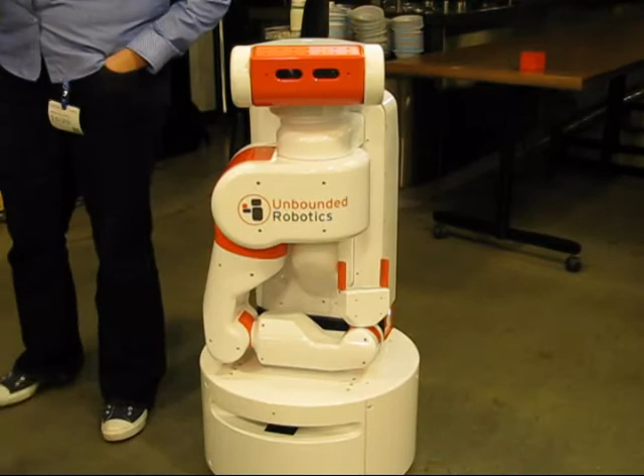Back in January of this year when we spun out, a lot of you came running up to me asking what are we building, and half of you asked if we were building Rosie. No matter how desperately I wanted to give that to you, we're not there yet. I hate to break it to you.

The question people constantly ask is: is the personal robotics revolution here yet? What I'm trying to do tonight is frame the importance of what we're trying to do at our company with this robot, and how it fits into the greater vision of robotics, specifically for personal robots. After my talk I'll answer a couple of questions, then Mike will give a more technical demo showing some of the software on the robot.

In the 1920s, robot first became a commonly used word, used in a Czech play. In that play, these mechanized beings took over the world, like all robots do, it seems.

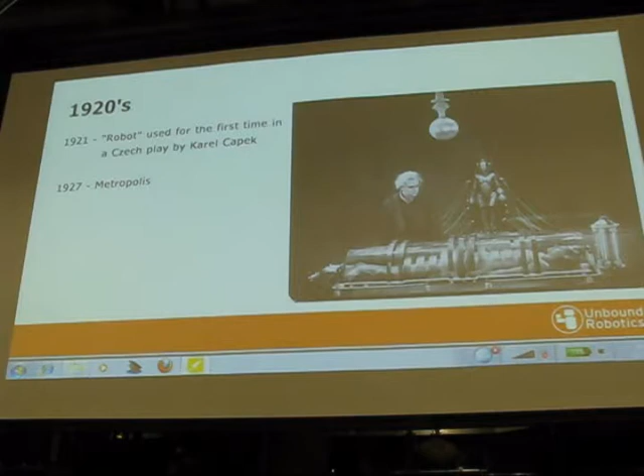Only six years later, Fritz Lang made a movie called Metropolis, considered one of the first robot movies, and again it showed the eventual demise of the human race at the feet of robots.

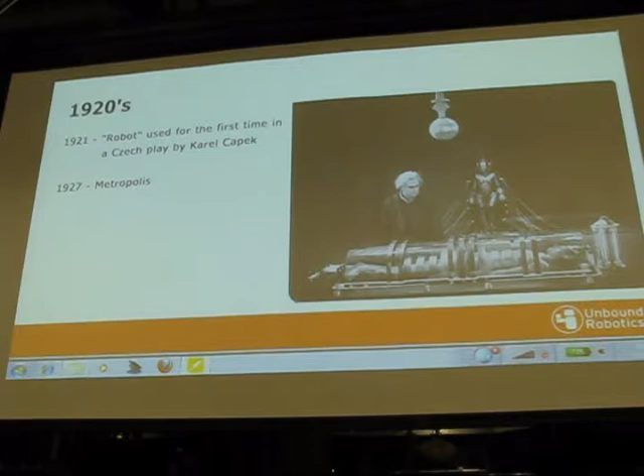So here we are in the 1920s, a robot actually hasn't even been built yet, and we're already predicting that they're going to take over the world.

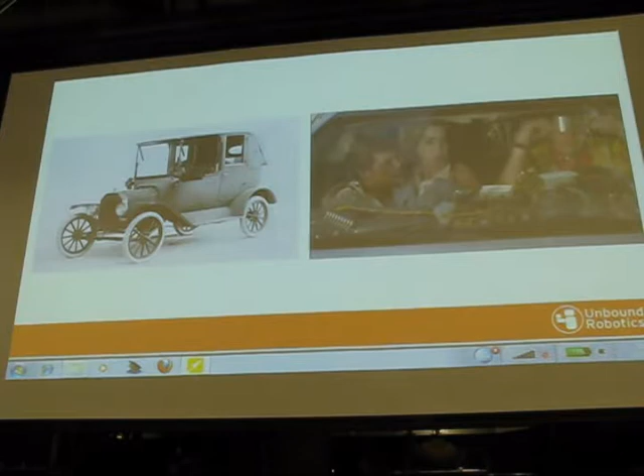It's kind of like Henry Ford puts the Model T on the market, and then Back to the Future comes out saying we don't need roads. So you're like, well, come on Henry, where's your autonomous horseless carriage?

That's kind of the pressure that's been put on robotics, even as far back as the 1920s. We don't even have robots yet.

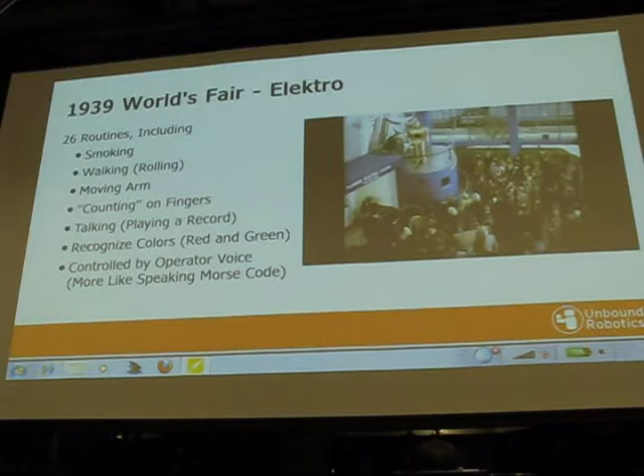In 1939, considered maybe one of the first robots - if you asked people before 1950 what a robot was, they'd refer to Elektro.

Elektro was just a mechanism that could do 26 unique tasks. What was really cool is it had a whole bunch of vacuum tubes, and the operator would speak into a can in a Morse code pattern. He'd say, okay Elektro, let's go - if there were 3 things, the robot would walk. If there were 3, then 5, then 2, the robot would smoke. Because that's what all robots need to do.

Those 26 actions were really cool, but they set expectations really high - and we still don't really have a robot yet.

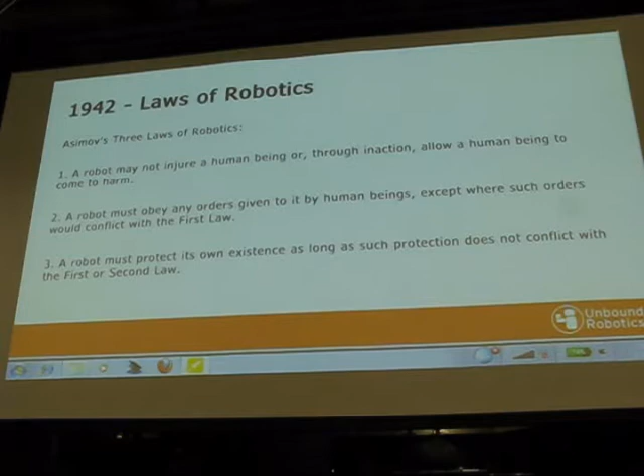Then in 1942, still no robots, but Asimov had already made rules for us. It's pretty rough - the field hadn't even started.

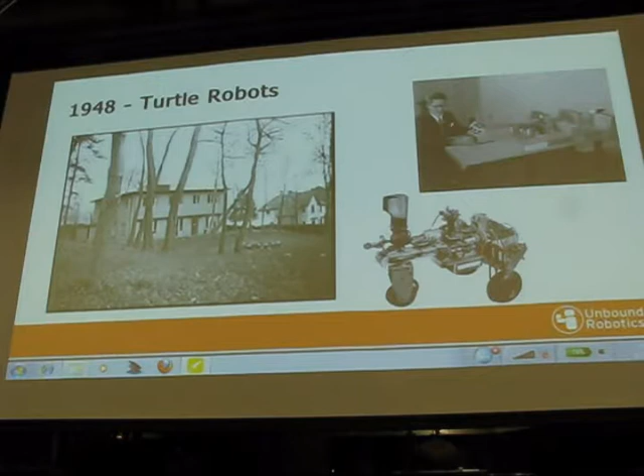Okay, so 1948, our first robot - bio-inspired robots. Gray Walter was working in Great Britain, and he made what was called the first turtle robot. He actually made a pair of them, Elmer and Elsie, and they could drive around and react to their environment. It was all the rage.

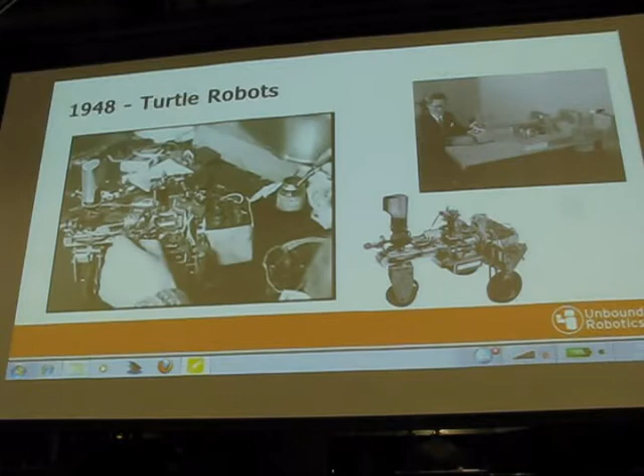Dude, I wish I could have done this. He made some very interesting and complex contraptions all the way back to 1948, and they could react to their environment very well, so it was pretty cool.

But then 1954 came, and it was awesome. The Unimate arrived, and we suddenly jumped from a bio-inspired turtle robot that doesn't do much...

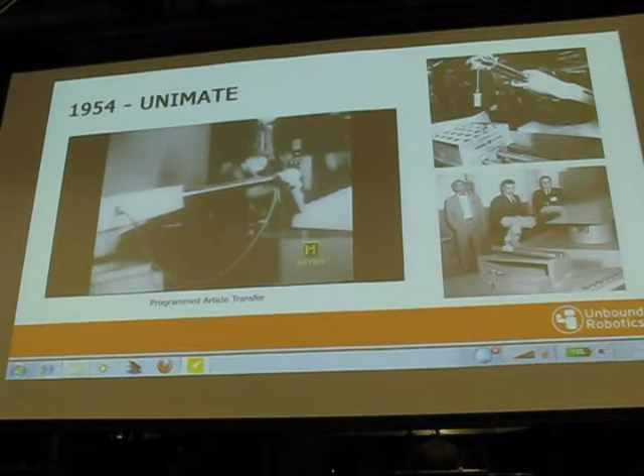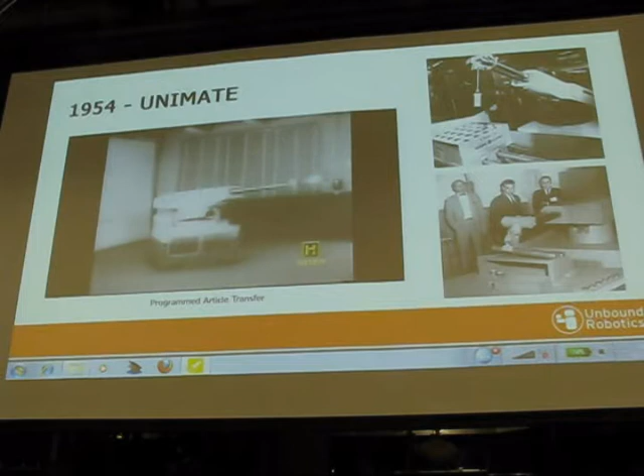1954, the Unimate - a programmed article transfer device, which is really cool because they didn't even start calling these robots then. This robot actually took 7 years to finally end up as the first robot in a GM manufacturing plant.

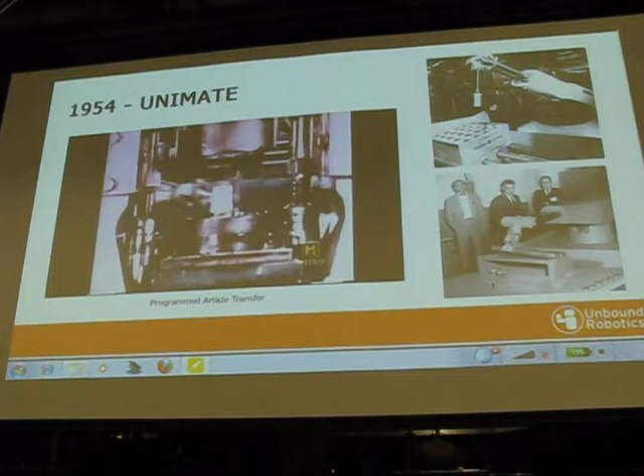It would actually pull very hot things out of a press and then cool them down. And what's really cool about the unit is that it didn't have a computer. All the programming was done on metal tapes, like metal drums, and it was completely pre-recorded. You would put it in there, run the operation, and it would just do that forever.

At this point, you don't have computers really controlling robots. Then in 1966, forward kinematics brought the homogeneous transform - groundbreaking, it enables robots and computers to finally come together. The math is there to finally do interesting things with robot arms. So the Rancho arm is the first computer-controlled arm, though it's still not electric. Then several years later, the Stanford arm comes out, and it's the first fully electric computer-controlled arm. That's groundbreaking, and it happens all through the course of the 60s.

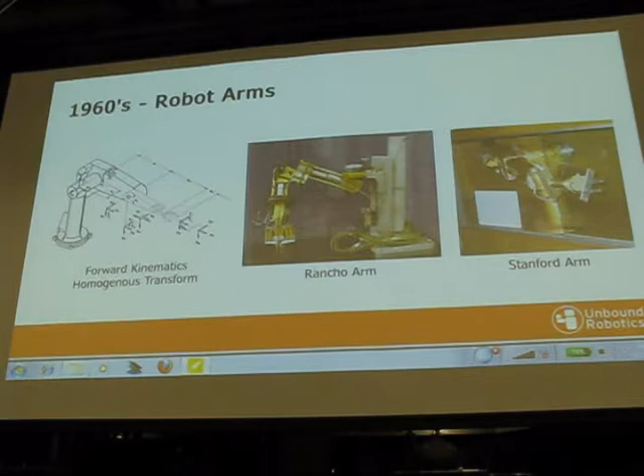But unfortunately, we're barely moving our arms in robotics, and HAL is kicking our butt, you know? Here we are as roboticists - we've barely got robots, and we've got robots taking over the world, people in space. I mean, they're not even on Earth anymore, they're in space.

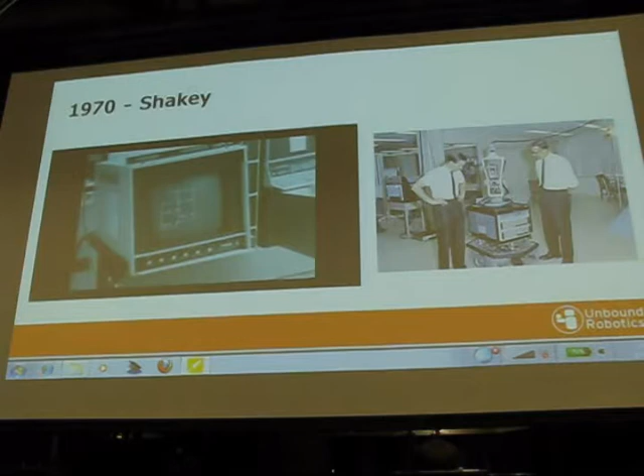Then in 1970, the dawn of modern-age robotics - Shakey, which was created at Stanford Research Institute. It wasn't going to be called Stanford Research - it started off with that, and then it became SRI International.

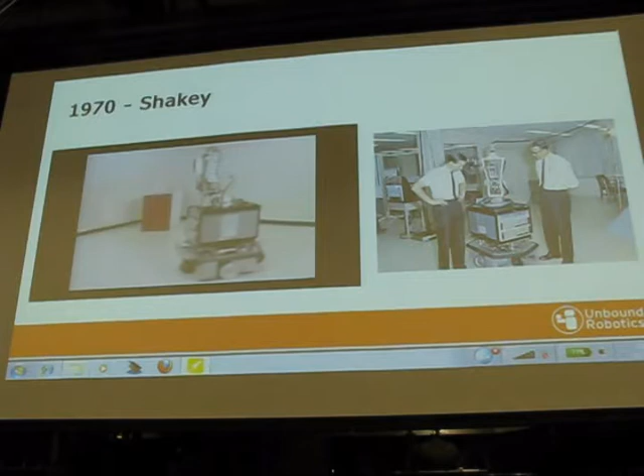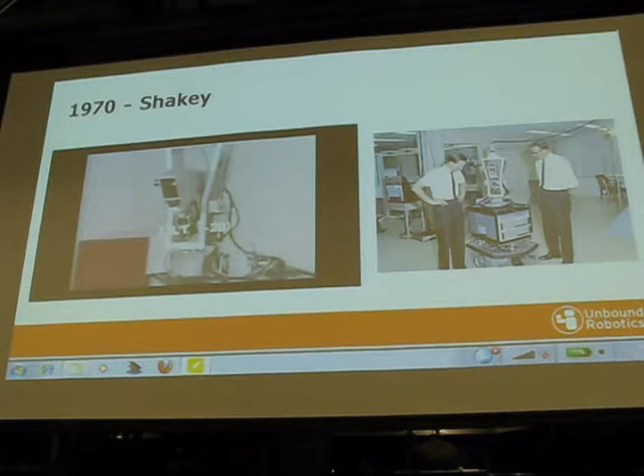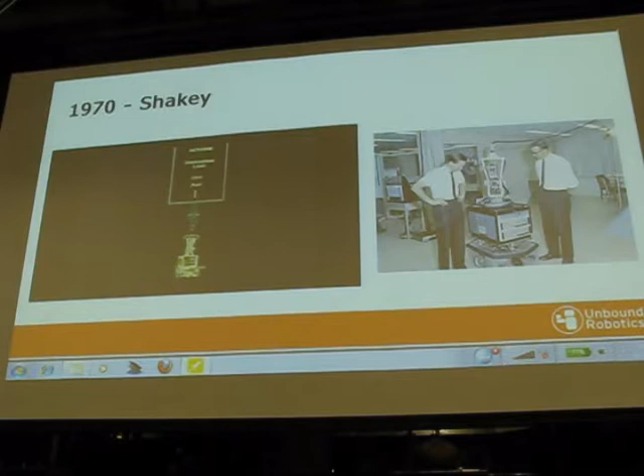But what's really cool is this robot could drive around autonomously, and the way it would execute its programs is it would collect data locally on the machine, and then use radio transmission to transmit it back to servers. In the 1970s, people were already doing wireless communication for this robot to do off-board execution. What's interesting is she actually took about an hour to drive 2 meters across the room - so we're not going groundbreaking speeds here.

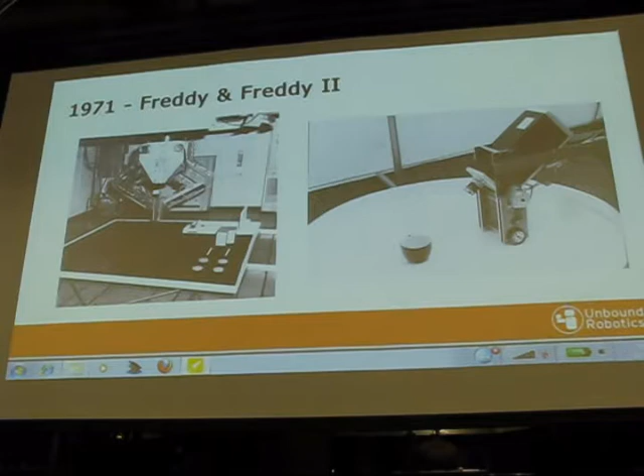At that same time, while people were working on autonomous mobile robots, people were also working on autonomous manipulation robots. Freddy and Freddy 2 were manipulation robots that could identify blocks, pick them up, and stack them. So here we've got the two parts of personal robotics sitting out there across the United States in different labs, working on autonomous mobile robots and autonomous manipulation.

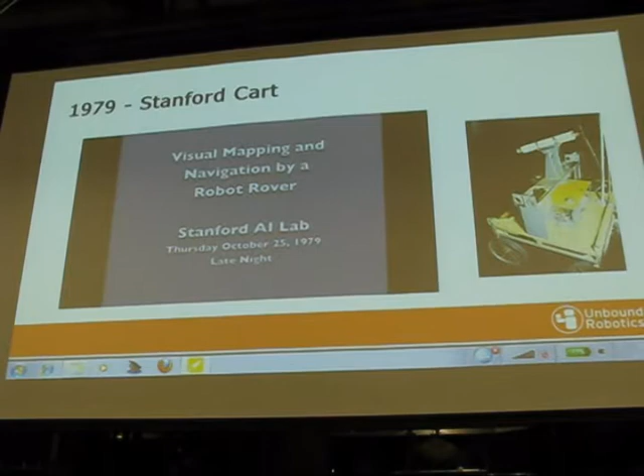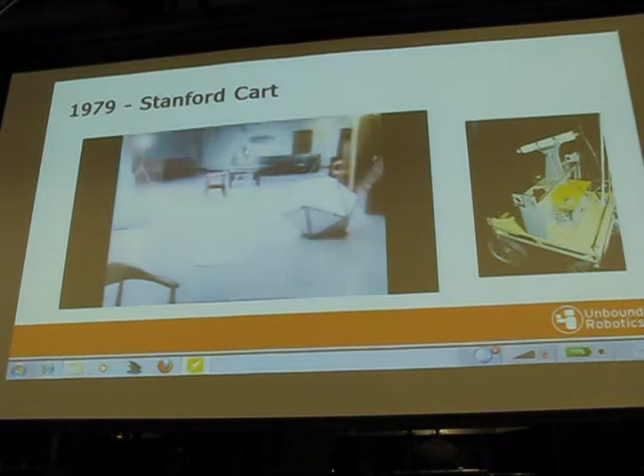Then in 1979, the Stanford Cart came, and it was really interesting because it did all the processing on board. It was actually able to go across an entire room full of obstacles by itself. It may have taken 8 hours to do it, but that was pretty high tech for the time.

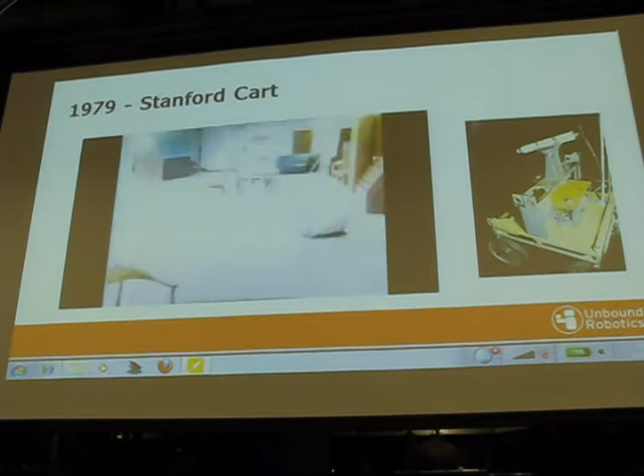Suddenly you had its only autonomous agent - you could let it loose in the room and it would behave on its own, monitored, with probably the people sitting there worrying. But it was the first step in truly autonomous behaviors.

Then the 1980s came, and everyone went in every direction possible. It was truly a birth of everyone doing anything they could for robots to do phenomenal things. It was very limited to people with lots of financing and money to do interesting robotics. A lot of people worked on walking robots that could play instruments, robots that could drive around autonomously, and we saw a lot of movement in industrial robots because they had very nice conditions - everything was kind of a green environment.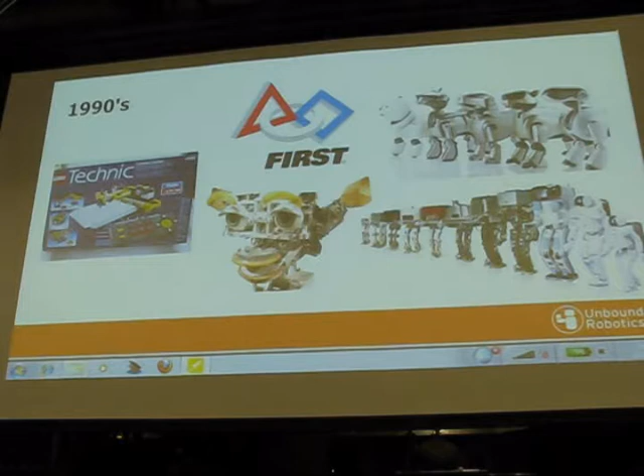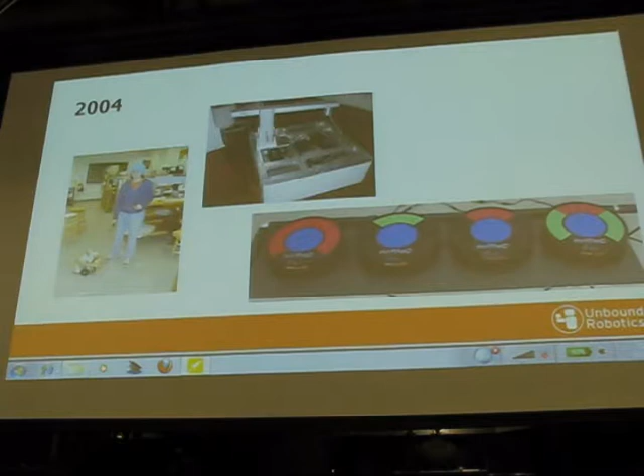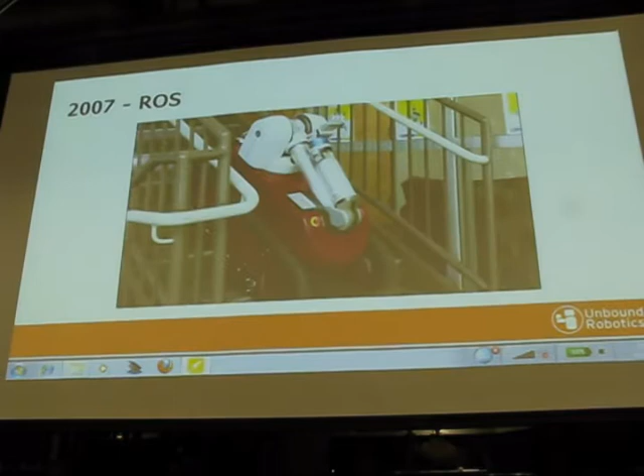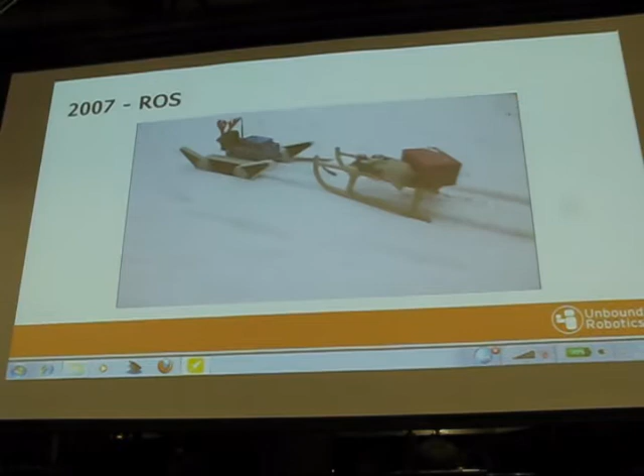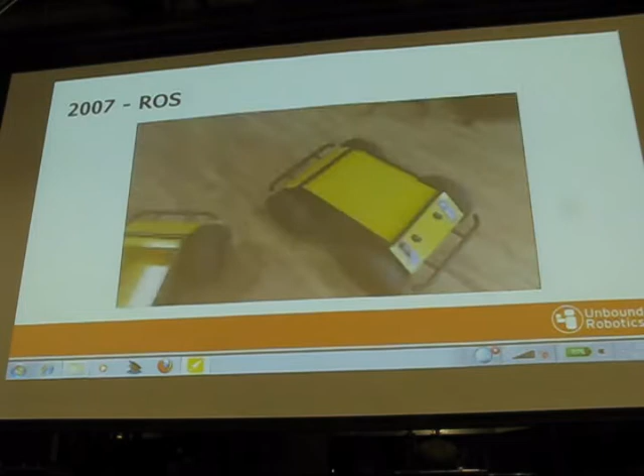In 2007, I went to work for Willow Garage, and we started working on ROS. ROS is what catapulted robotics development from people doing everything separately in the 1980s and 1990s and not talking to each other, to something talking to each other. Open source middleware enabled programs that used to run on one robot to run on many robots. All the robots shown in this video are running the same software, which is very empowering.

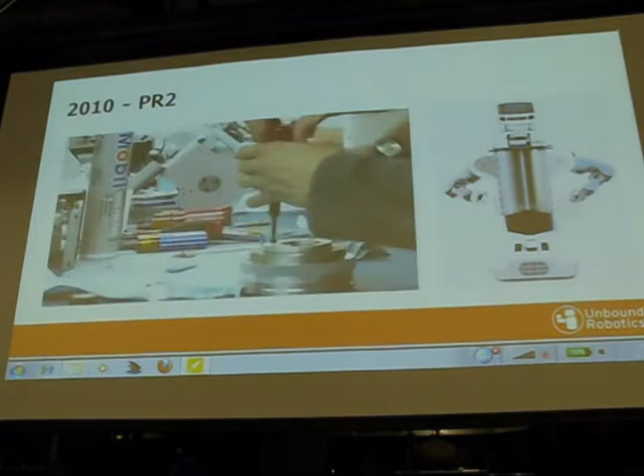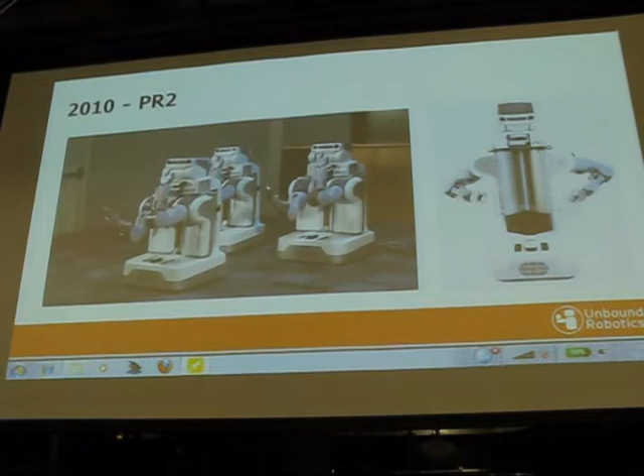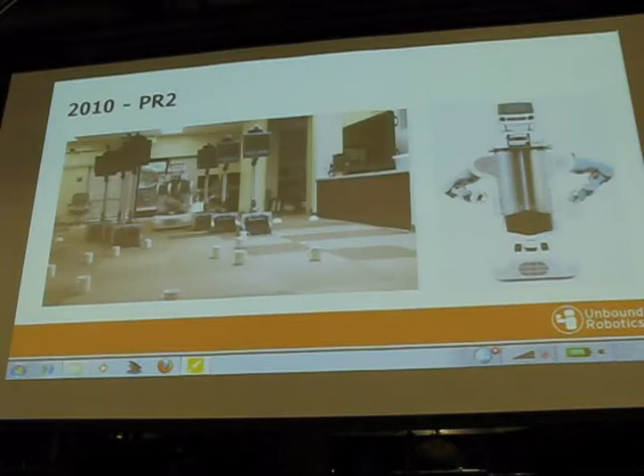In 2010, Willow Garage released the PR2. The PR2 showed something interesting about having a platform for robots. There are today 43 PR2s in the world, spread out across about 39 institutions - some people have two. What it enabled was collaboration on a whole other level. When you have robots that are not the same, it's very hard, even with a common software infrastructure, to have common applications that can run on those robots.

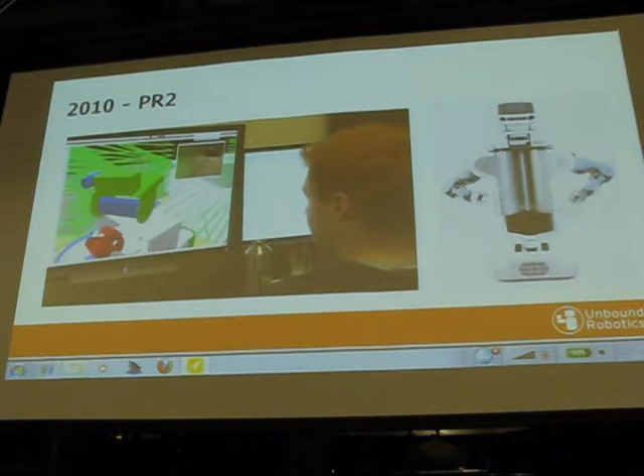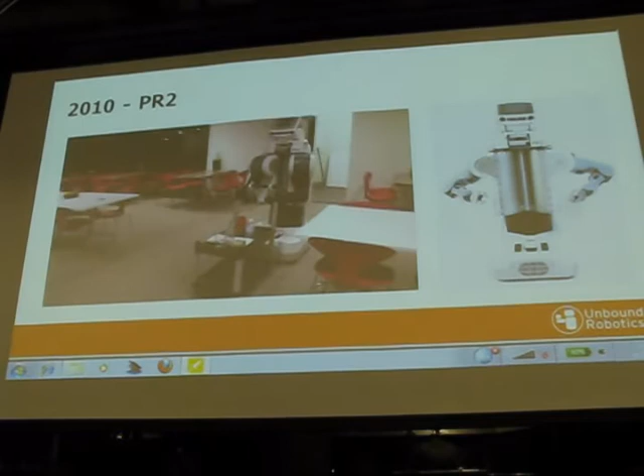It's the same as phones, it's the same as computers - you have to have a bridge to start developing applications. The PR2 was kind of the robot that made that bridge, combined with the software platform.

When we compared the PR2, there were a lot of other mobile manipulation platforms that came out around that same time. The difference between them and the PR2 is there's only one of them, and they're pretty big. Most of these robots cost about $300,000 to $400,000, just like the PR2. But the difference is, like I said, there's only one of them, and it was very hard to collaborate among these robots and help advance state-of-the-art robotics.

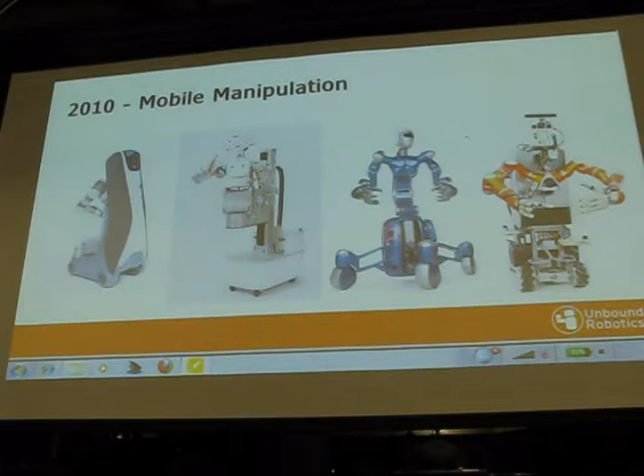Then in 2011, Mike started - you can see that ROS enabled people to do interesting things. Mike was able to do all sorts of interesting things with hardware that Derek and I weren't able to do in 2004, because the software was there to enable him to prototype and iterate hardware faster and easier.

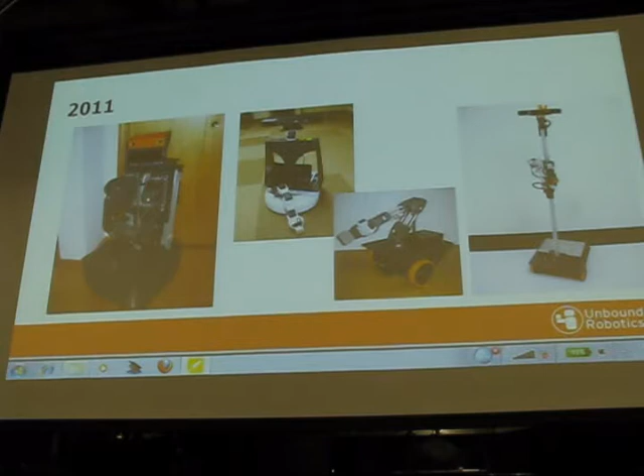In 2011, myself and a coworker worked on a project called Turtlebot to try and bring the cost bar down for enabling people to do more interesting things with mobile robotics. But the big feedback we got was, well, all we can do is drive around, and that's not very interesting because we can't actually interact with the real world.

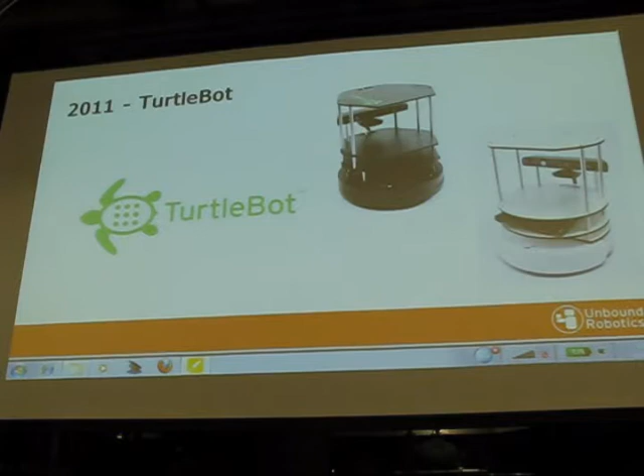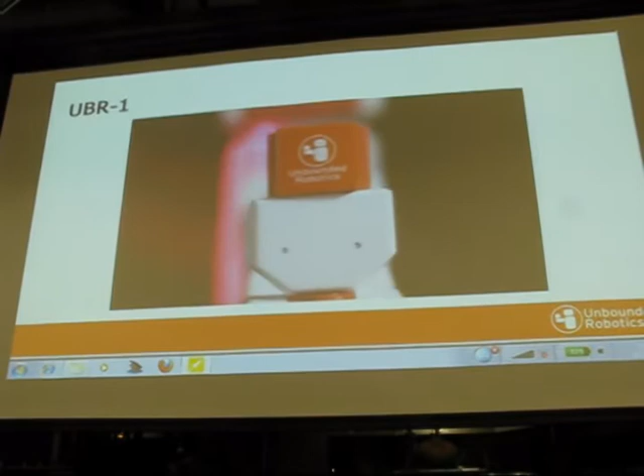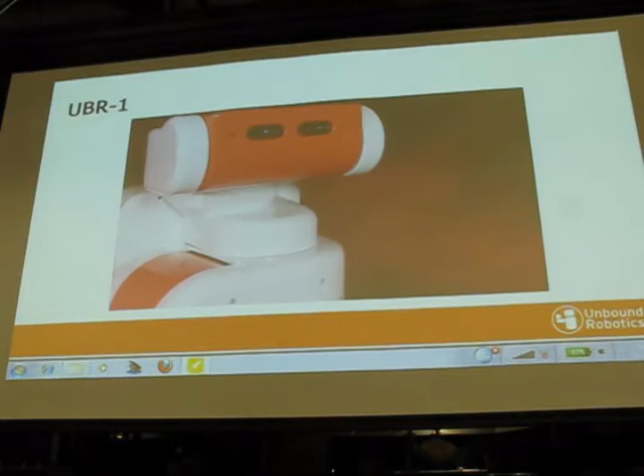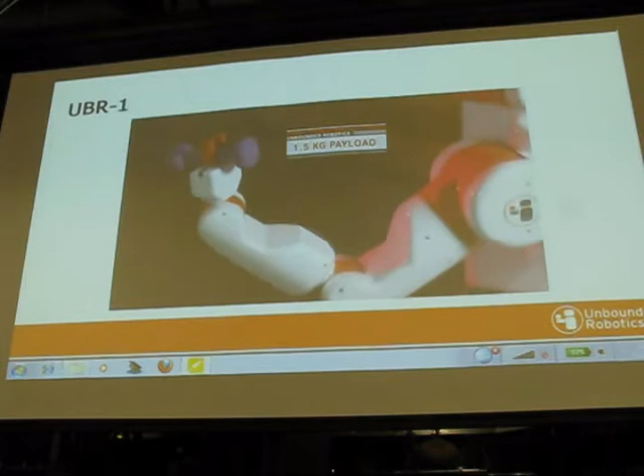So when we spun off from Willow Garage company, we wanted to change that. We wanted to enable people to have access to robotic platforms at an unheard of price, $35,000, to really enable a large amount of people to have access to a single platform and change the landscape of robotics. We see this platform as not only something that can be used by universities, researchers, and corporate labs, but also as something that can go out and do real work in businesses. That's our vision for our company - advancing the state of robotics in general.

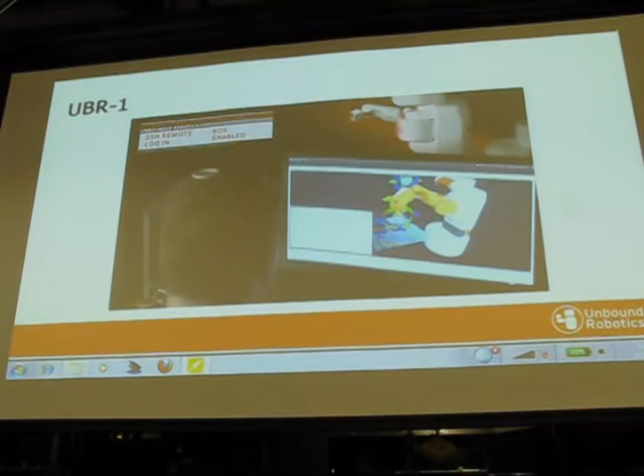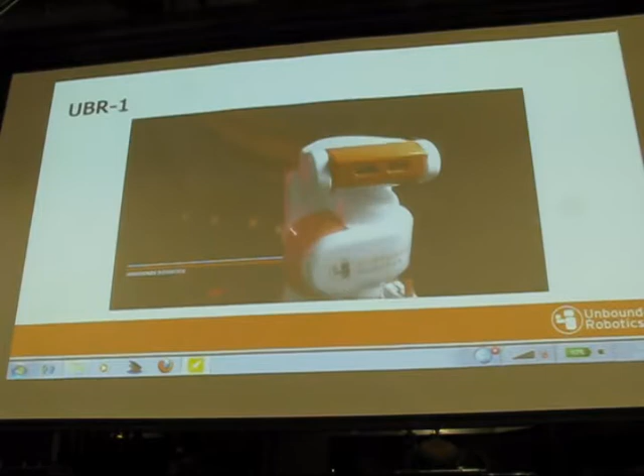What did you say the cost of this was? The question was, what is the cost? The cost is $35,000 for the base model.

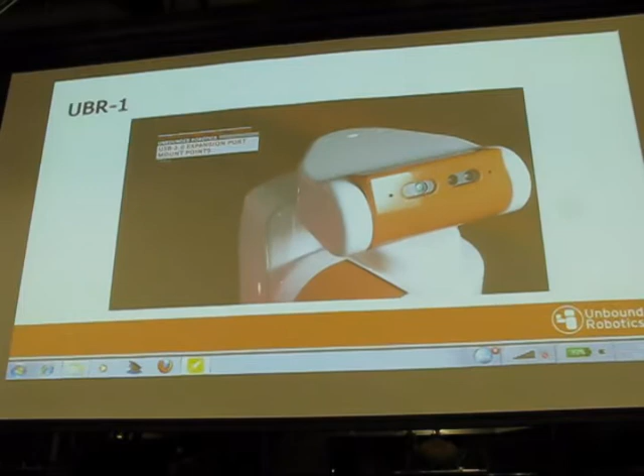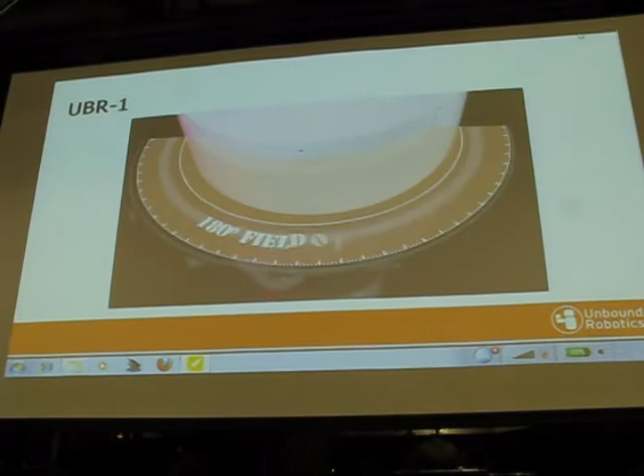What's the difference with Baxter? The question is, what is the difference between this robot and Baxter? There are several differences. Baxter is not a mobile robot, this robot is, so it can drive around. It also has the ability to have a telescoping torso, so it can lift itself up and down. It has a single arm as compared to Baxter, but this robot is also an integrated platform, so it has a complete vision solution. Baxter only has webcams in its grippers, whereas this robot has a full 3D camera in its head, so it can perceive its environment for collision avoidance while doing manipulation.

Telepresence - that's a good question. It depends on how you define telepresence. The robot could have the capability to log into it and stream the data remotely and then actuate the robot remotely, but are you going to have a screen on the front of the robot? No, this robot doesn't have that screen on it.

Did you say it's using a LiDAR or a camera to sense the environment? The robot actually has two main vision sensors. One in the head, which is a 3D camera, RGBD camera, like a Kinect type camera. And then in the base, it has a planar laser scanner that can see 4 to 6 meters out at a 180-degree field of view.

Can it be used outdoors? No, it cannot be used outdoors. The camera technology, the Kinect, and the laser technology are both based on IR, and the sun is a very bright IR emitter, so the technology is not rated for outdoor use. But there are sensors that can do it, so eventually you could possibly see it being outdoors.

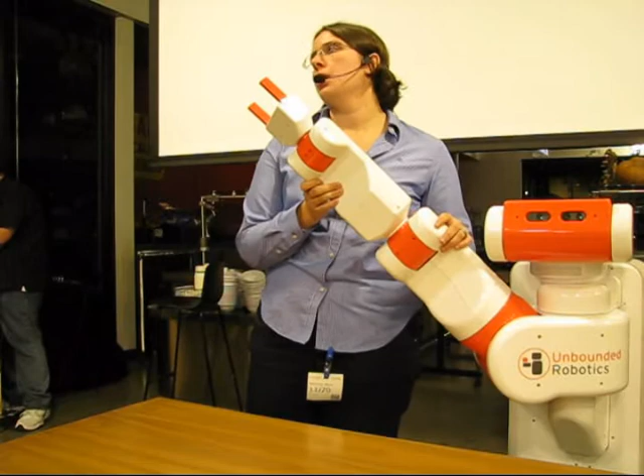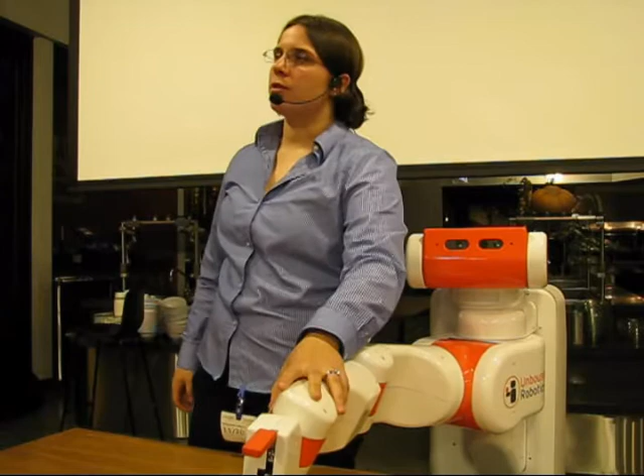How big a crew do you need to take UBR-1 out? You need 2 people right now to take UBR-1 out. UBR-1 weighs about 160 pounds, so we put the robot into a van, and then we just lift it up - it's a 2-person lift out of a van. How many people did it take to deploy the PR2? With a lift gate, just getting it in and out, yeah - the PR2 weighed about 450 pounds, so it's a significantly bigger robot.

How does it charge? There are actually 2 methods for charging the robot. We have an external DC power brick that you can plug into the robot. We also have an autonomous docking station, so the robot can drive up onto its docking station and do continuous operations.

The docking is just conductive. It basically has contacts that communicate with the dock and the robot to make sure that it's not a child licking the contacts. Well, you never know - children are curious.

How can we order and what is the lead time? We are getting ready to take orders. The lead time is about 9 months because we're going to do a production run. The entire robot's been designed for production quantities, and it just takes that long to do injection molding and get all the parts ordered and get the motors off the boat from China and things like that.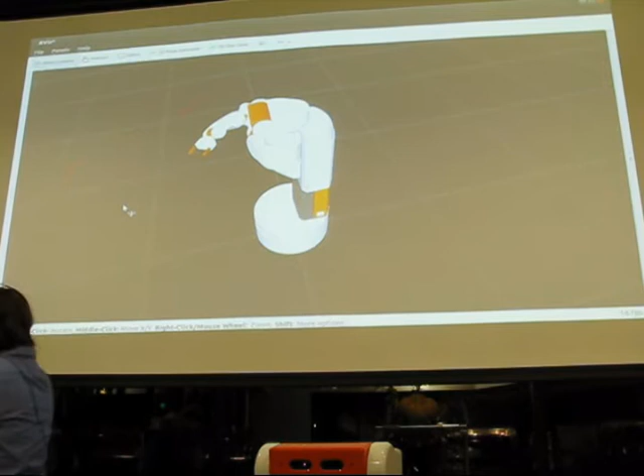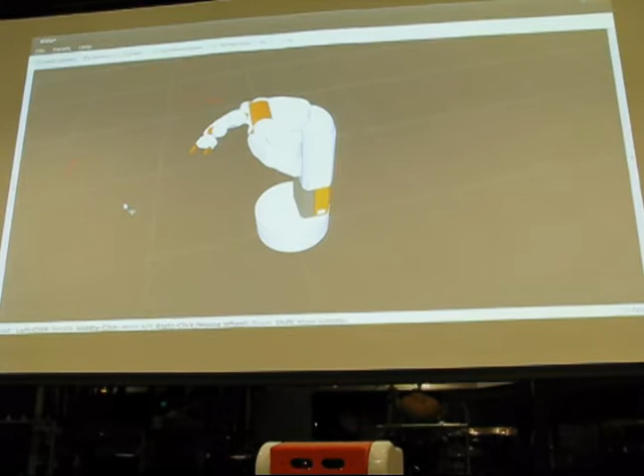So you've probably all seen our vids before. This is the viewer for ROS. Right now what you're seeing is the robot moving around, and I see why we're not seeing objects to the head - once I get the head back down there, it's actually picking out where that table is and where that cube is, so that I can go out and grab that. This is using a package called MoveIt, which is fairly new and does collision-free planning for the robot arm.

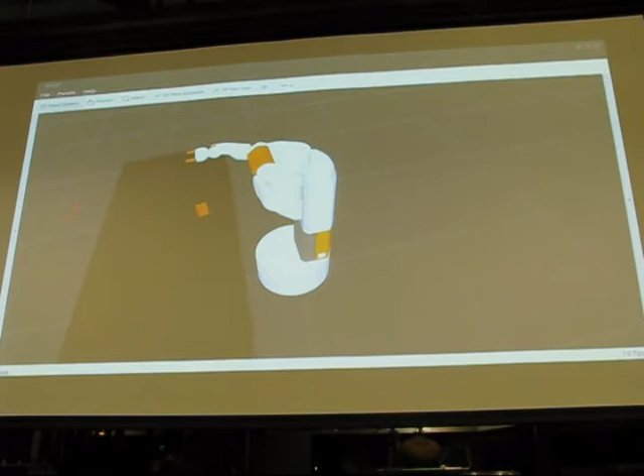So from there, I'm going to stop updating those continuously and switch it over and have it pick something up. So you see it updated there, it's all the object - it's going to come out, it's going to pick that up, and it's just going to move it to the opposite side of its visual frame right now. So just a simple demo showing this whole system coming together.

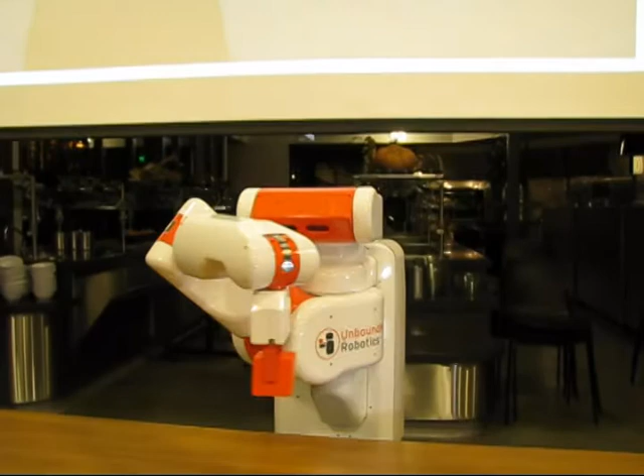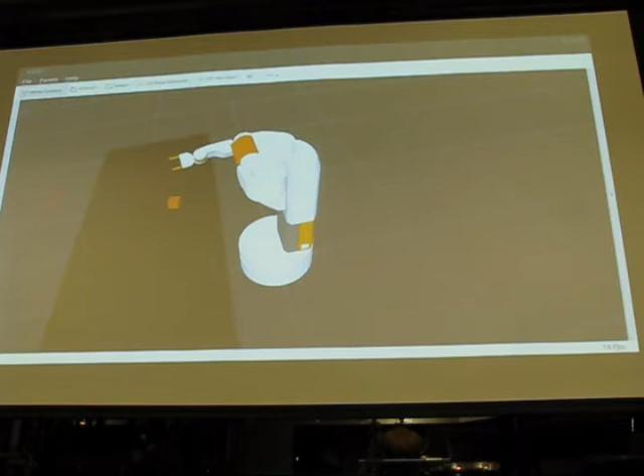If I get it moving, it's actually doing everything online - all the planning, all the actual object perception. This is one of those things that will come out of the box; users can go out and pick things up. For the PR2, this was actually like 3 years after they initially shipped before you had that sort of capability available. When it first shipped, it had navigation, just drive around in a 3D world. That was groundbreaking at the time, but this is even quite a bit further forward.

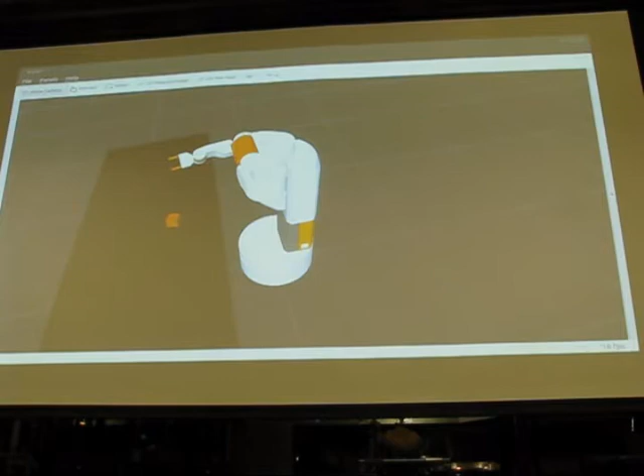Does it have force feedback? So the question is, does the robot have force feedback? The arm is actually controlled by brushless DC motors, and we can measure the current going through the motor relatively accurately and get a good sense of force. Then you can do the forward kinematics, basically projecting that force backwards and forwards through inverse and forward kinematics, and effectively compute the force at the end effector. It won't be as accurate as a force torque sensor, but it's a good approximation, and it's lower cost - force torque sensors cost a lot of money.

So that's what you were doing when you were moving the arms around, just picking that up? Oh, so it was actually aiding you in moving it. No - the way the arm is actually being controlled, we have joint encoders on every joint and encoders also on the back shafts of the motors, so that we can get very accurate position and velocity estimates on the arm. Then we can do forward kinematics through the arm to basically get to a goal position.

What objects will it recognize and manipulate automatically? So right now we haven't spent much time on object perception because it's actually a research field.

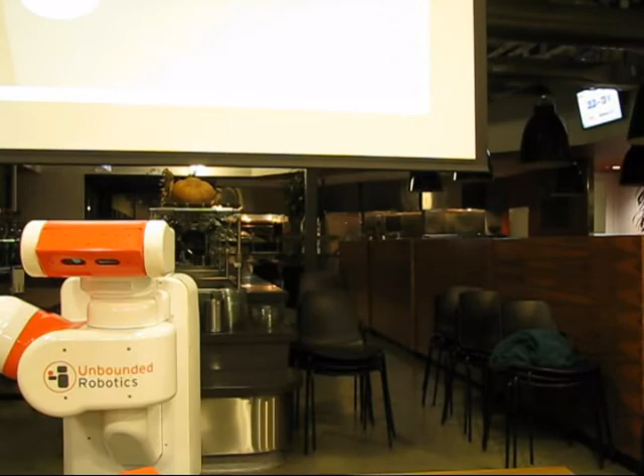How fast can it move and how good are the joint encoders? For the wheels, the robot can drive at a velocity of three-quarters of a meter per second. The wheels have a back-shaft encoder that goes through a 10-to-1 gearbox and then a 2-to-1 transmission, so it's a 20-to-1 ratio—really good. The encoder on the back is 14-bit, so you get sub-millimeter precision on the wheels, though you'll slip more than your encoder's resolution. You can fuse in the IMU to help with that.

It's really good, but I figured I'd give you more of a sense of it, all the way back there.

The question is how the arm stays up. Right now we're using active gravity compensation: we use the position of the arm to compute the torque needed at any position to counteract gravity. We do a forward or inverse kinematics calculation along with the inertia matrix of the arm to compute how much torque to put into the motors to keep it floating. You can see the arm is completely back-drivable—I can move it around like this, and it's free-floating, always counteracting gravity.